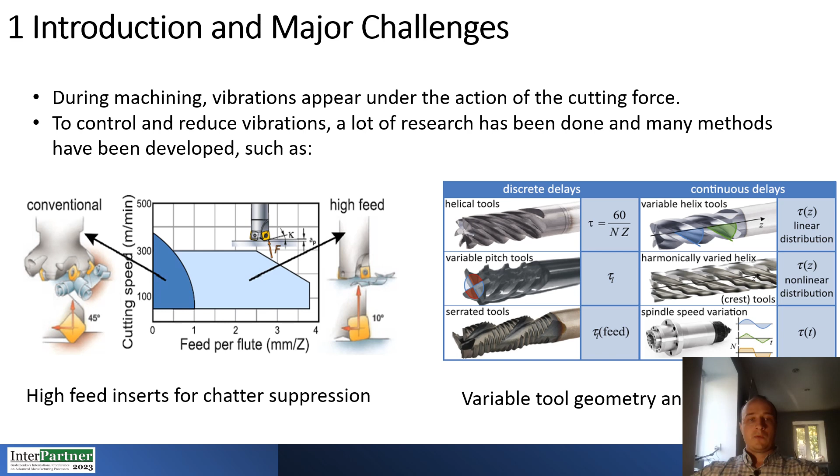Many methods have been developed to suppress vibration. The following methods are most widely used: using high feed inserts, using variable geometry tools, changing the cutting speed, and simulation of the general reaction of the assembly of the spindle and tool to the cutting process, using the stability

lobe diagrams. It should be noted that the studies consider either the overall effects of vibration on the cutting process without division into types: forced, free, self-oscillation, or the influence of self-oscillation.

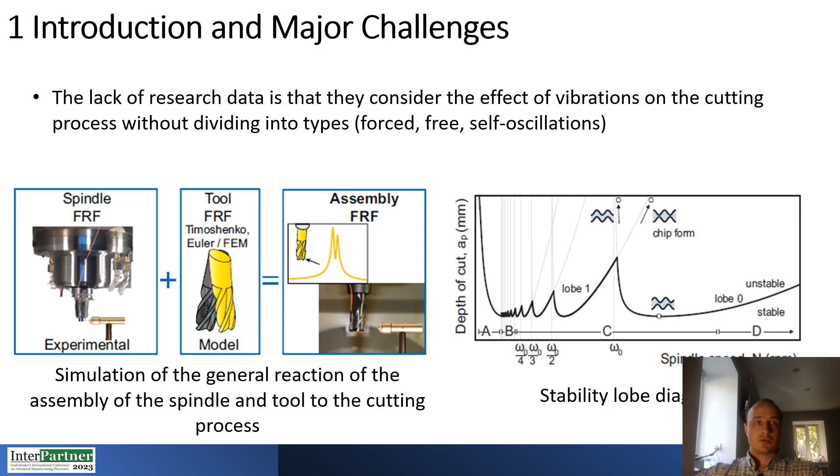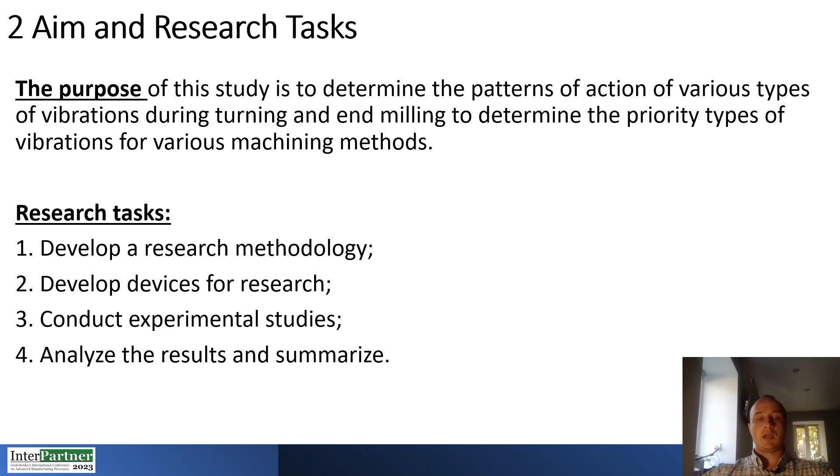The purpose of the study is to determine patterns of action of various types of vibration during turning and milling, to determine priority types of vibration for various machining methods. Research tasks are: develop the research methodology, develop a device for research, conduct experimental studies, analyze the results, and summarize.

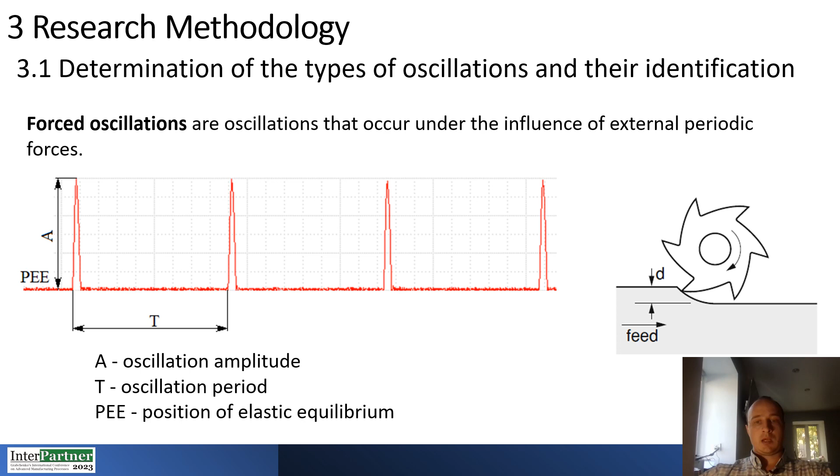It's known that forced oscillations are formed during cutting. Forced oscillations are oscillations that occur under the action of external periodic forces. These oscillations are characterized by period and amplitude. Also, free oscillations are formed during cutting.

Free oscillations are oscillations that occur in a system under the action of internal forces after the system has been taken out of equilibrium. Under the action of friction forces, free oscillations are damped. The amplitude of free oscillation depends on the initial conditions.

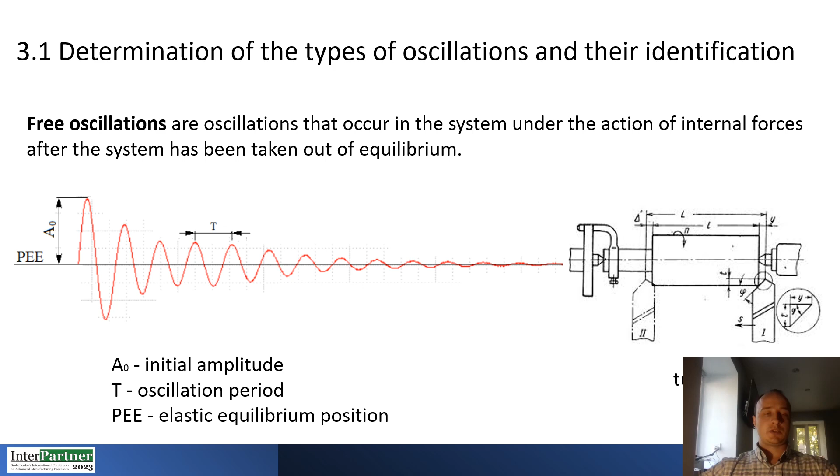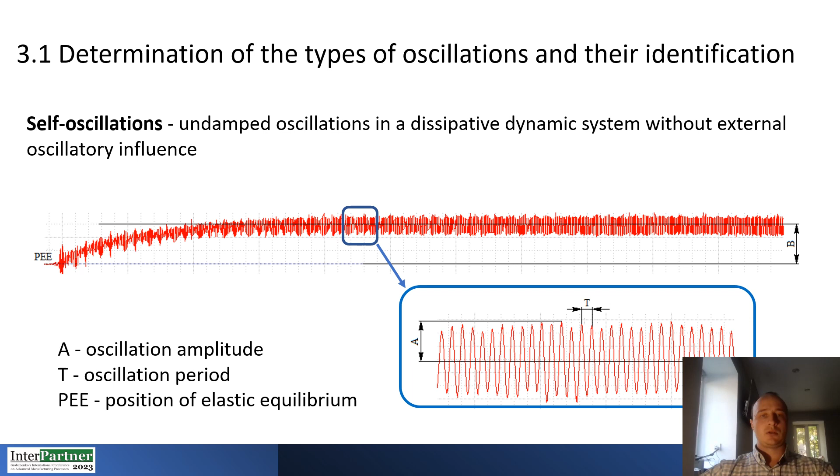Self-oscillations are most harmful during cutting. Self-oscillations are undamped oscillations in a dissipative dynamic system without external oscillatory influence. The self-oscillation amplitude does not depend on the initial conditions.

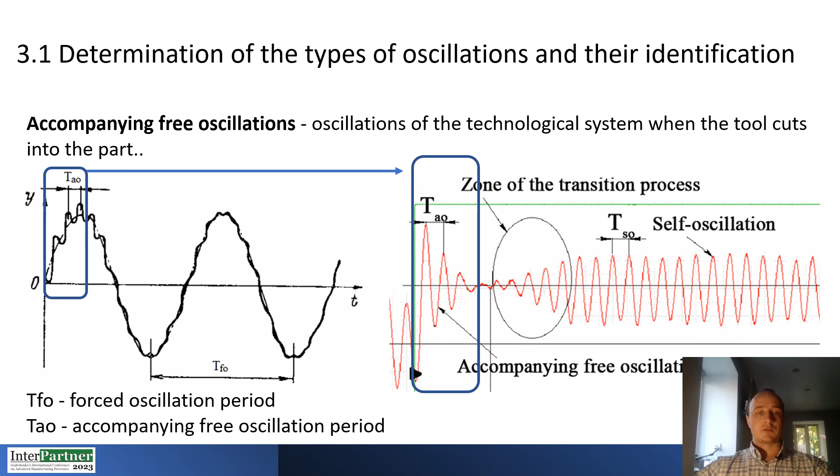In addition to the listed types of vibration, it is noted in the literature that accompanying free oscillations occur during cutting. Accompanying free oscillation of the technological system is oscillation when the tool cuts into the part. These oscillations have the characteristics of free oscillation.

To determine the regularity of action of vibration, a study was carried out during intermittent turning of a cylindrical workpiece with a longitudinal groove. Turning provided a large cutting time. The turning frequency was provided by the longitudinal groove.

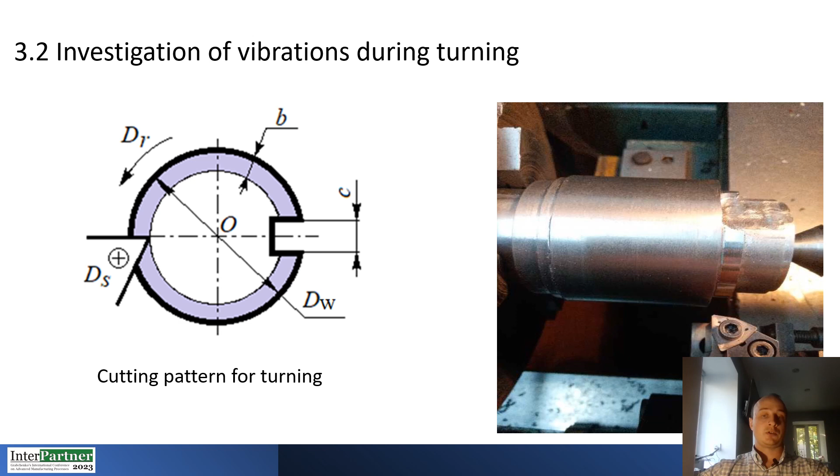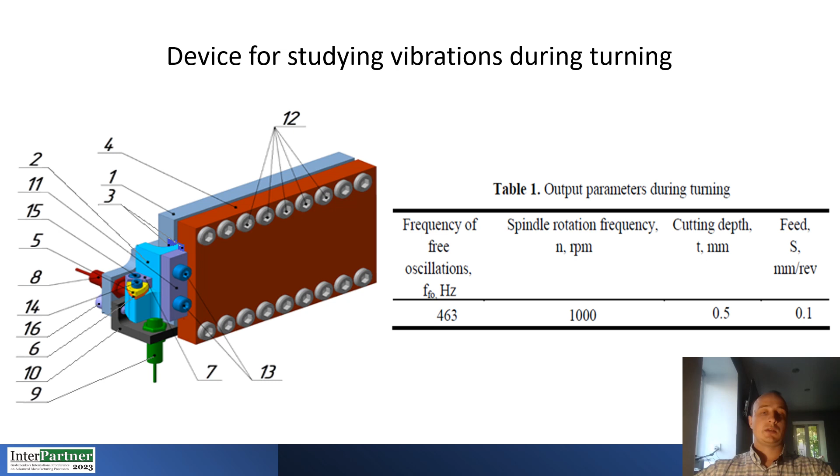The research device was a cutter in the form of an oscillator. The oscillation amplitude of the cutter was measured by a displacement sensor. The design of the device made it possible to adjust the dynamic characteristics of the cutter, register its oscillation during cutting, and determine the cutting time. The samples were made from steel 45 and the cutter had a VK8 hard alloy plate.

Study of the regularities of the occurrence of vibration during milling was carried out on a special stand, which allows simulation of the processing of parts. The device for measuring vibration was an oscillator, on which the sample was fixed.

Up and down milling was carried out at an axial depth of cut of 4 mm, a radial depth of 0.3 millimeters, a feed per tooth of 0.1 millimeters, and spindle speeds of 120, 200 and 700 RPM.

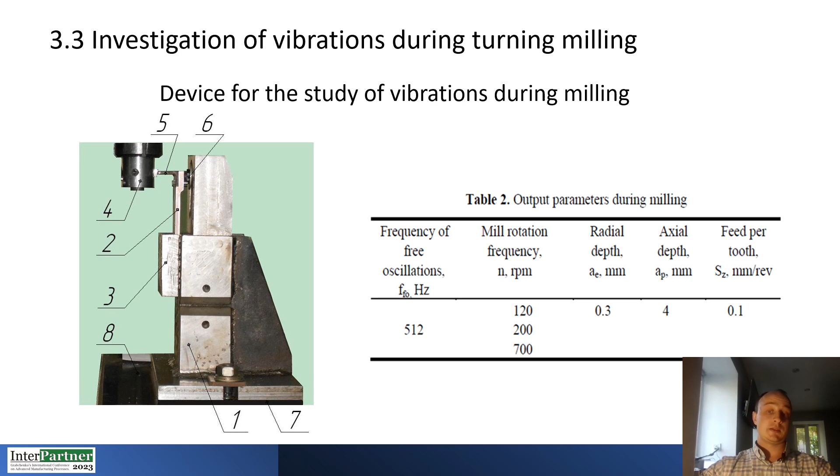The design of the device made it possible to control the dynamic characteristics of the sample, register its vibration during the cutting process, and determine the cutting time. Samples were made from steel, and the mill was from high-speed steel with a diameter of 16 millimeters.

The vibration recorded during the turning of the workpiece with the groove has characteristic features inherent in all types of vibration. At each revolution, the cutter hits the workpiece.

As a result, forced oscillations occur. Forced oscillations occur under the action of the cutting force, which presses the cutter by the value of Bx. They are superposed by damped accompanying free oscillations of the technological system with a period of TAO.

A wavy wake appears on the cutting surface, which is the source of undamped steady-state self-oscillation with a period TSO. Self-oscillation becomes steady after the transition period and before leaving contact with the workpiece. Then the workpiece moves in the absence of cutting, where a damped free oscillation of the cutter relative to the position of elastic equilibrium occurs with a period TFO.

Based on the results obtained, it can be stated that the regularity of action of vibration during cutting has the following sequence: forced oscillation superimposed on the accompanying free oscillation and self-oscillation. Free oscillation of the cutter relative to the position of elastic equilibrium after the end of cutting.

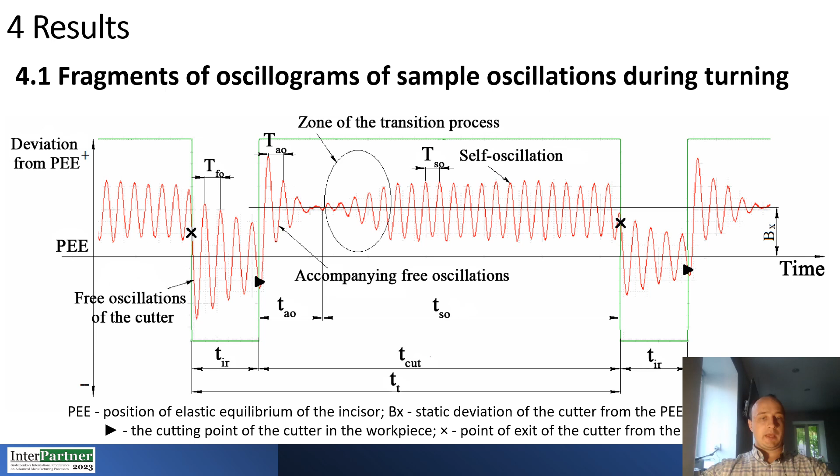Each type of oscillation has its own duration. Forced oscillations act during the entire cutting time, T-cut. The accompanying free oscillations act during the time TAO. After the attenuation and before the end of cutting, self-oscillation takes place during the time TSO. The free oscillation time of the cutter is determined by the idle time TIR from the end of cutting to the next cutting of the tool.

Vibrations during milling are characterized by low cutting time, which affects the types of vibration that occur. When milling with a spindle speed of 120 RPM, only forced oscillations are active during the cutting time T-cut. Due to the peculiarities of change in the thickness of the cut layer during up-cut milling, the indentation of the sample Bmax under the action of the cutting force is less than with the climb one.

With increase in the spindle speed to 200 RPM, the cutting time decreases. In up-cut milling, oscillations occur that are superposed on the forced ones. The accompanying free oscillations with period TAO act during the time TAO and decay. After the cutter exits the cutting zone, free oscillations of the sample with a period of TFO act, which also decay. Increasing the initial cutting speed leads to an increase in the amplitude of accompanying free oscillation.

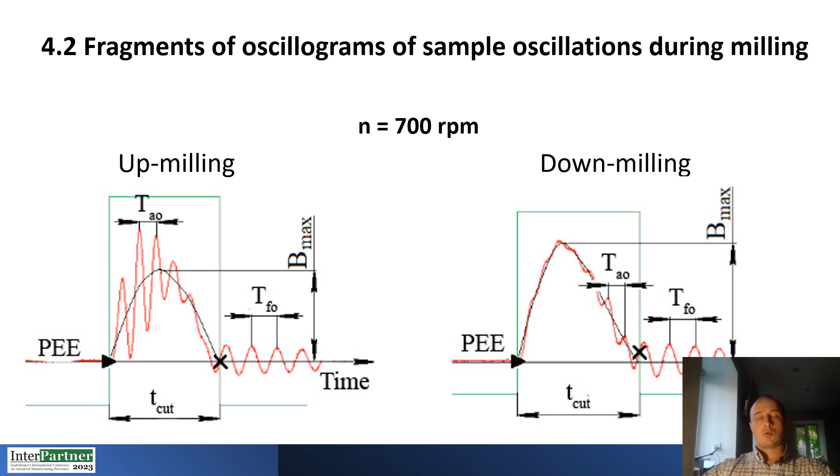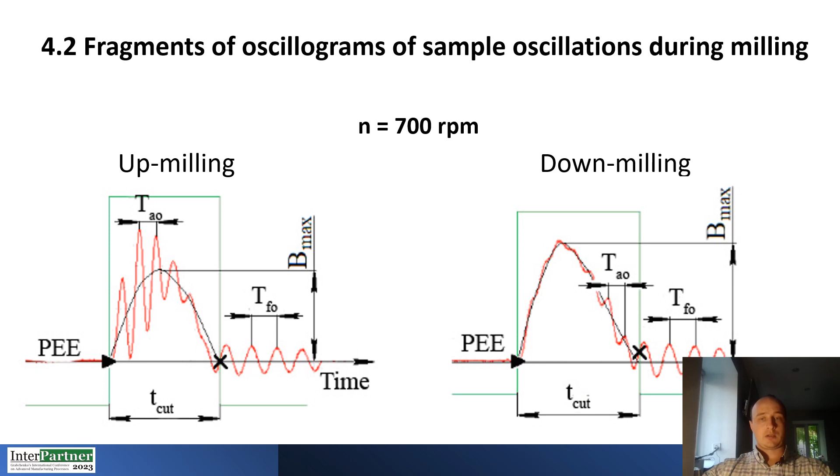When milling with a spindle speed of 700 RPM, these vibrations are superimposed on forced vibration, both in up-cut milling at the beginning of cutting and in climb milling at the end of cutting. The occurrence of free oscillations and their attenuation during end milling is associated with a change in thickness of the cut layer. Based on the results of the studies, the following conclusions were formulated.

The regularities of the action of various types of oscillation during cutting are determined. First, forced vibrations act and accompanying free vibrations of the technological system are superimposed on them. After their damping, adjustment occurs and stable self-oscillation occurs. The possibility of developing various types of oscillation depends on the cutting time. For example, when turning, when the cutting time is large, conditions arise for the action of all types of vibration. In end milling, the cutting time limit does not allow stable self-oscillation to occur.

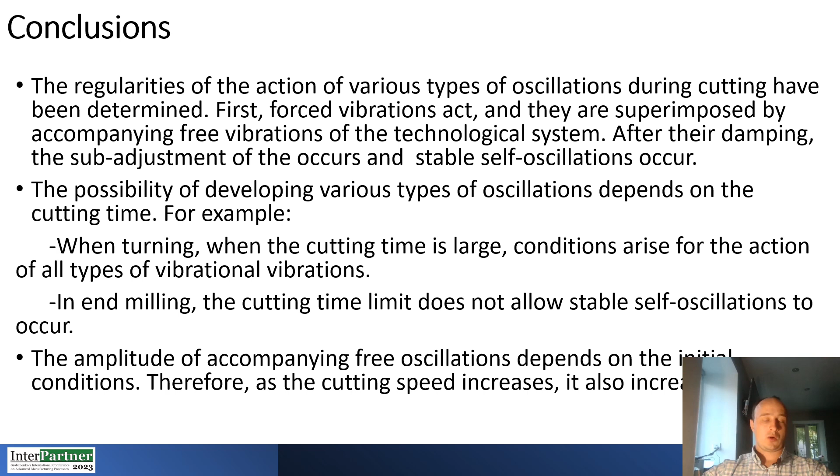The amplitude of accompanying free oscillation depends on the initial conditions. Therefore, as the cutting speed increases, it also increases. In further studies, it is planned to determine the effect of dynamic properties of the technological system and the amplitude of accompanying free oscillation on the cutting modes and tool geometry.